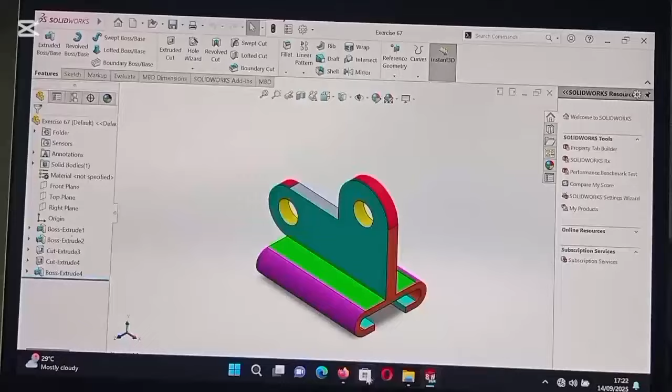Today we are going to modeling exercise 67.

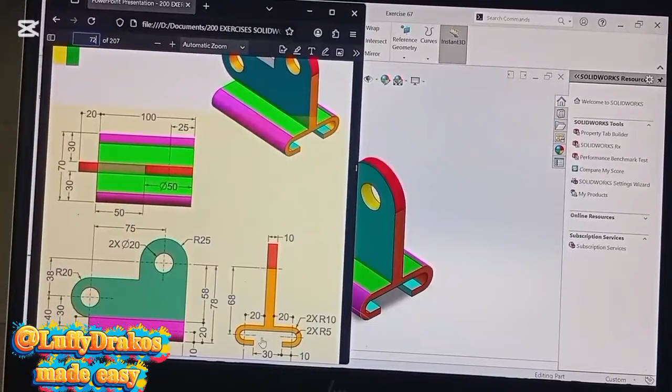Looking at it, we are going to be using the right plane. We are going to be drawing the back view of it, which is this part on orange, the lower base actually. Then we're going to extrude it. So let's start.

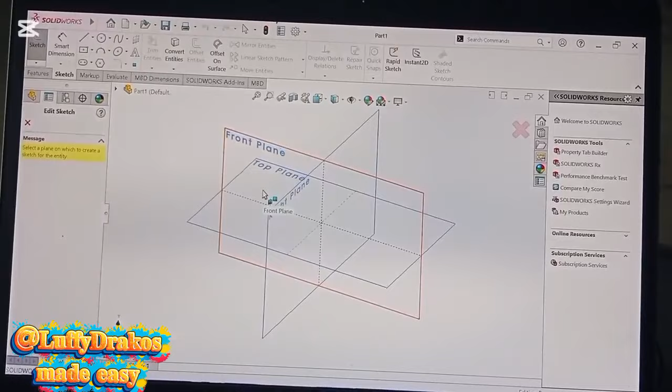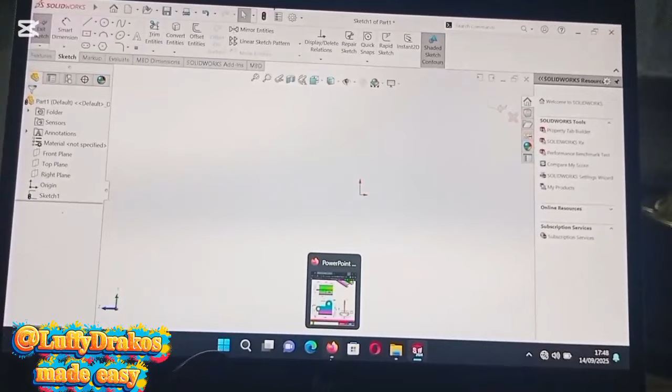Looking at the parameters, we are using 50. Center arcs are 50, while from the two edges is 30. So let's first draw a center line, because I want to use mirror imaging so that it's going to be faster and more efficient.

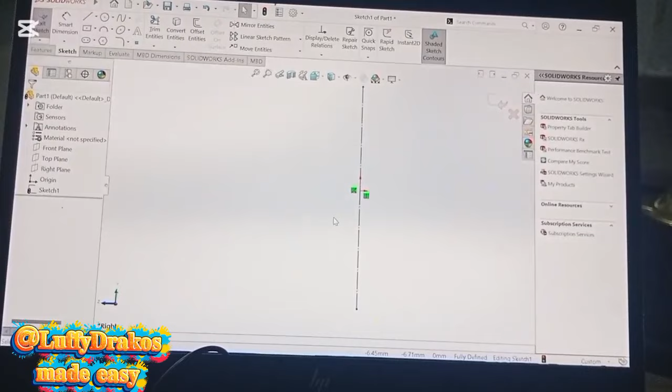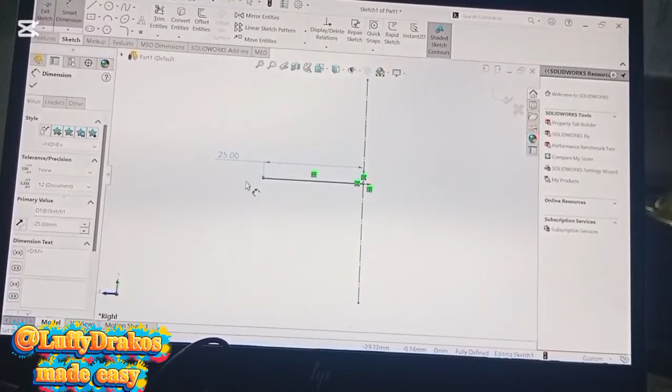So I'm dimensioning here 25 since it's half, which is 25. So I'm going to dimension 25. Then I'm going to draw the arc next. Just drag it out and back to the points for you to have the curve on your next dragging out. Give it the radius of 5.

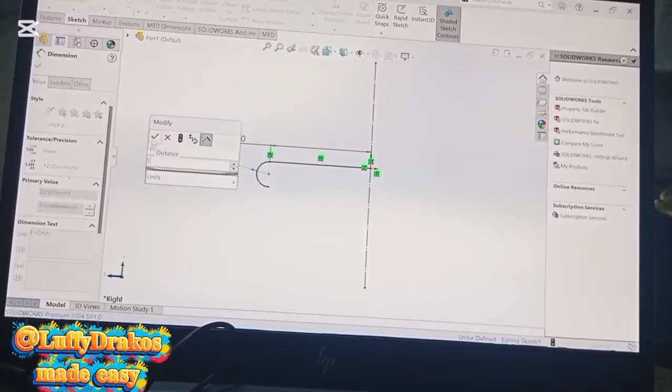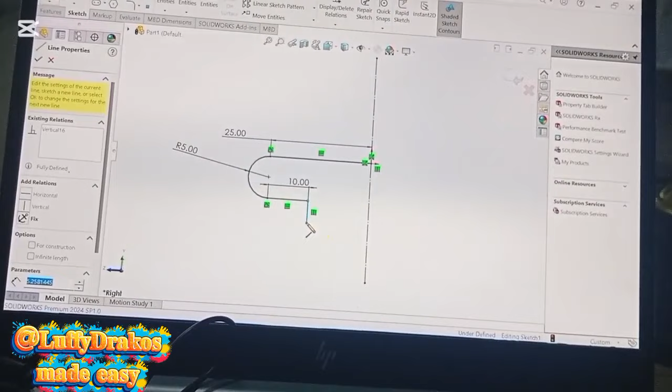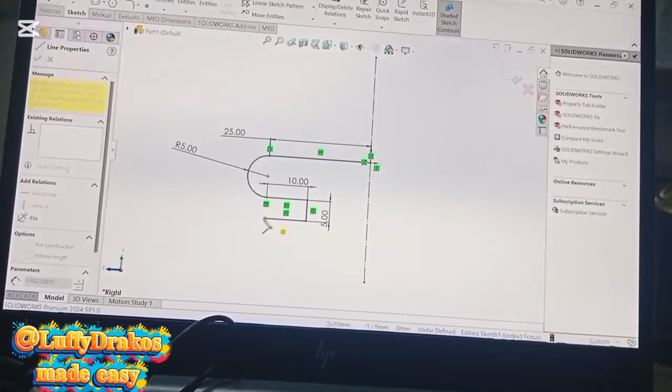I'm going to dimension that part 10. And you can see here is 5. This part is going to be 10.

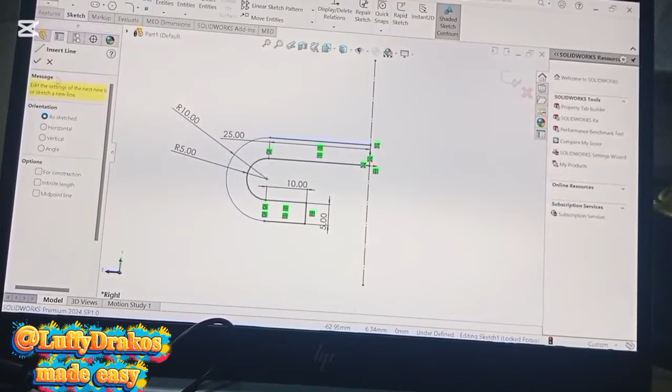So I'm going to delete the 25 dimensioning we did. Then I'm going to dimension it from the point of that arc to the center line. Just give it 50.

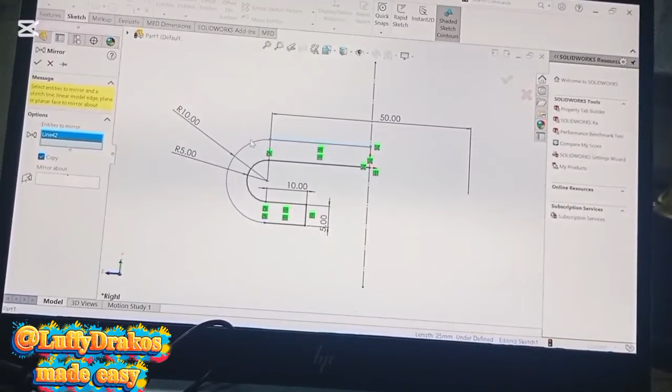Then I'm going to use the mirror entities. Then click on all the sketch. Then you click next on mirror about and tap on the center line. Then click on the tick.

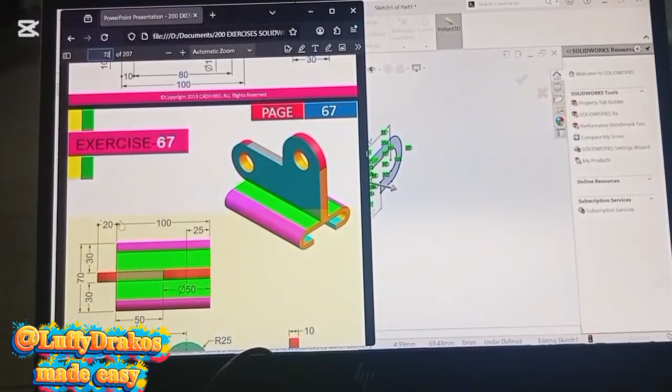So next we're going to be using our features extrude boss base. Looking at the diagram, you can see the length is 100 millimeters. So let's extrude.

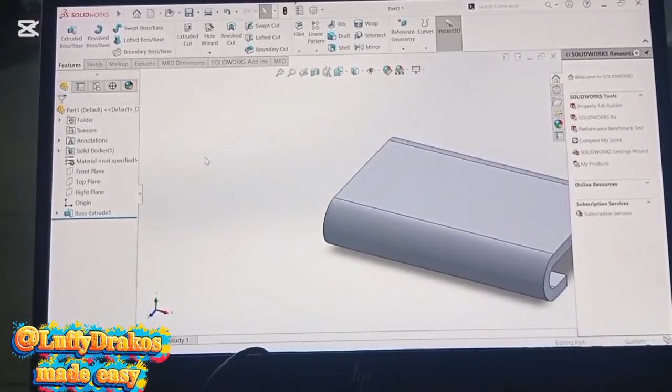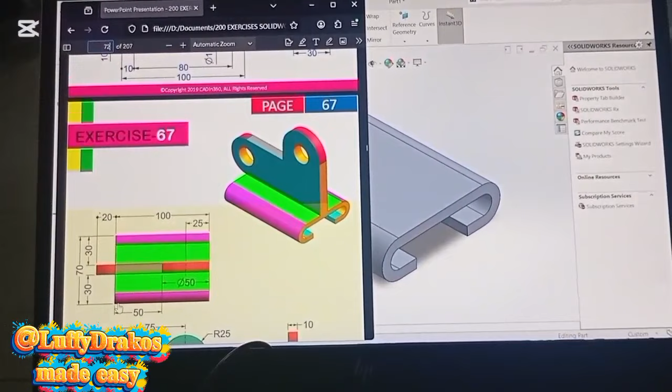So as you can see, this is the isometric view. So next we click on this surface and put up the next sketch, which is this part that looks like an L letter. Looking at it, you can see is just right above it, and it comes out.

So the total length, slantly looking at it, is 100 plus that 20, which is 120, and the distance from the vertical height to the first point is 30.

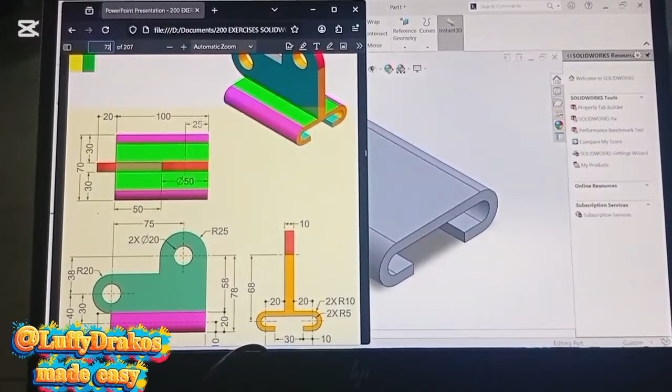First going to draw the center line, then we'll pick the midpoint of our center line and draw with our center rectangle. Let me pick it again. Center rectangle.

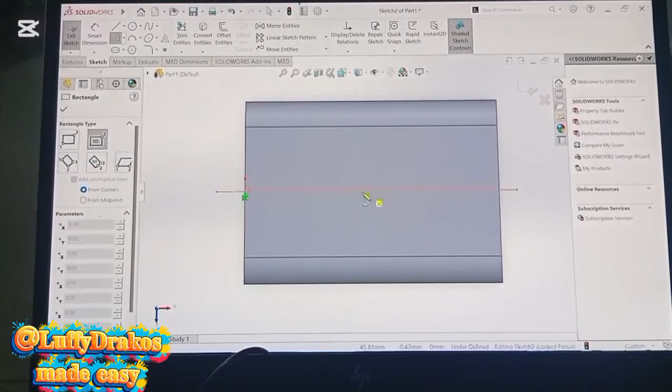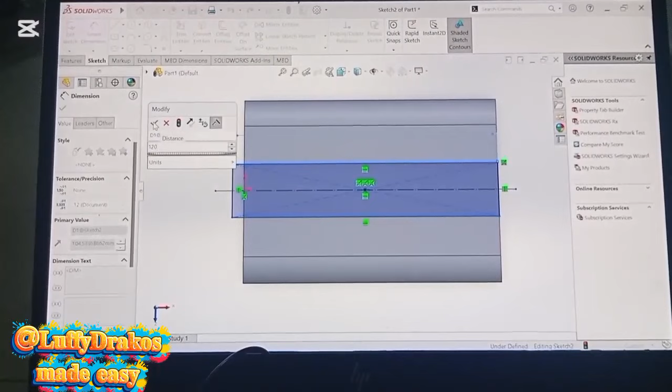So here is going to be 120. The other part is going to be 10. While the distance from the first edge to the tip is 30.

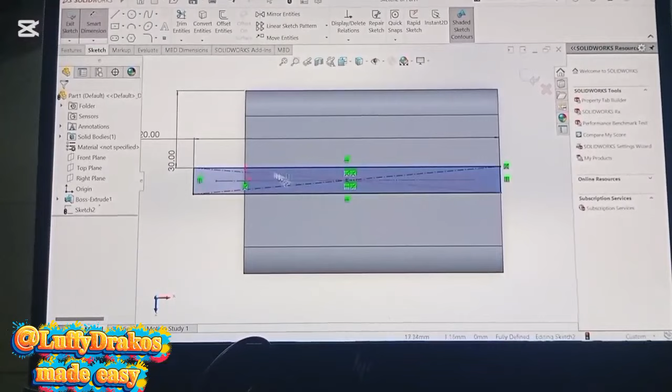So looking at it, the best option for extruding from the bottom to the center of the top circle is 58. So let's go with 58.

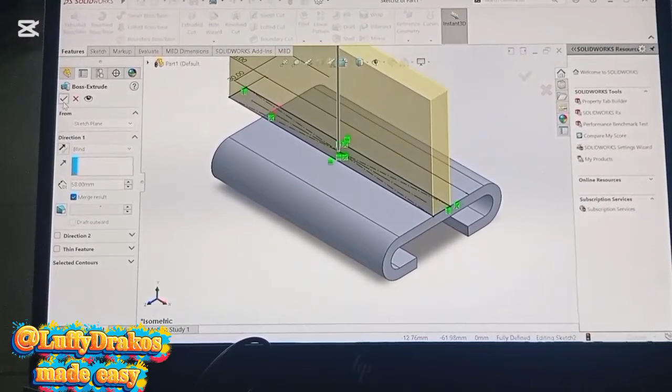So next we click on this surface and edit sketch. So from the center of that curve to the midpoint of the first circle is a distance of 30. So you can see.

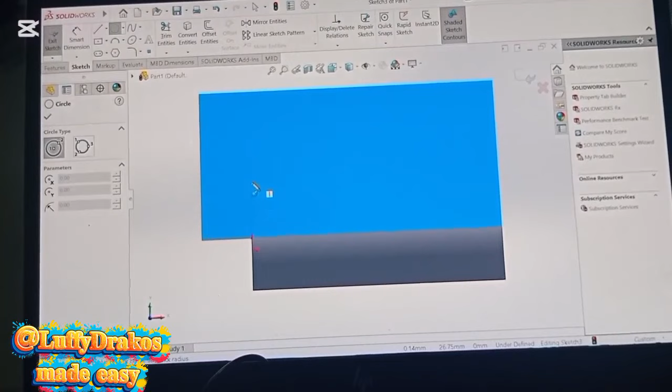I didn't talk about the 20 because the distance from that tip to that center point line is actually 20 already. That's why I didn't talk about the 20. So now let's dimension from that point to the center of that curve, 30.

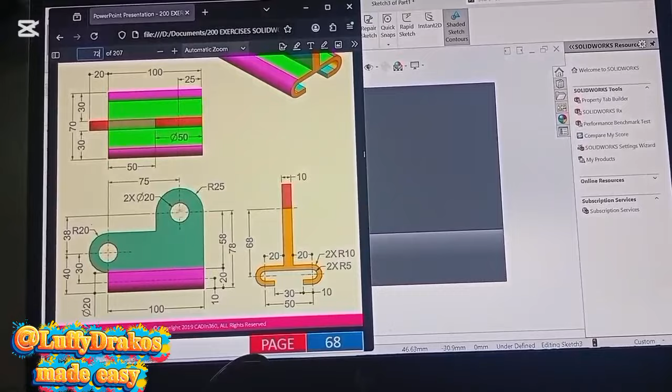So looking at the radius of the outer curve, you can see it's 20. Turning it into a diameter will give us 40. So I'm going to diameter the first circle 40, and the inner one, which is 2x, is 20 diameter.

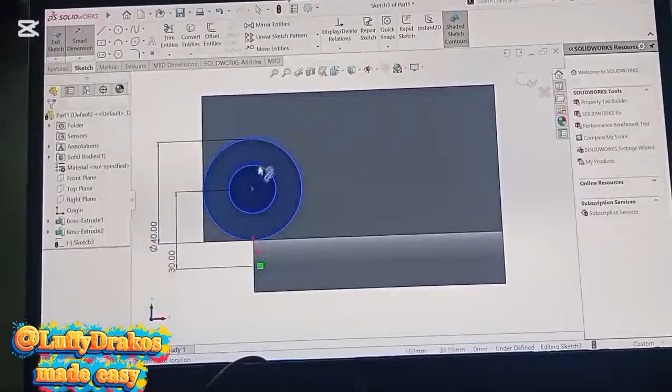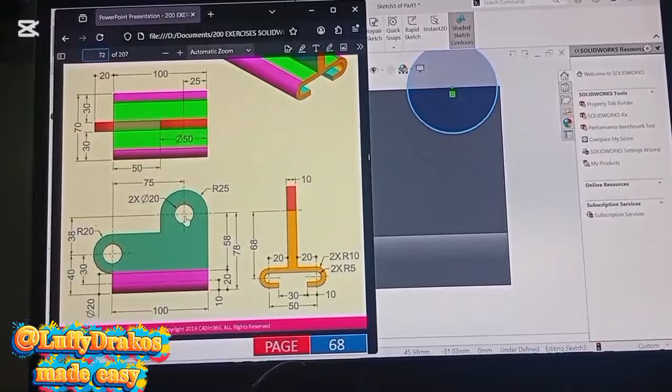You already know the midpoint of the upper circle is 58, which we extruded. So we're just going to draw from that tip and dimension from both center points. The distance given was 75, so that we'll have the circle at the exact spot we want it. So let's go to dimension it 75 now.

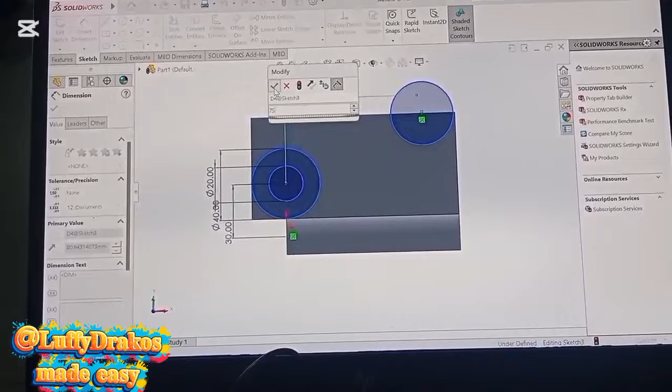The radius was 25, so we're going to make the diameter 50. Same thing with the inner one, which is just 20 diameter.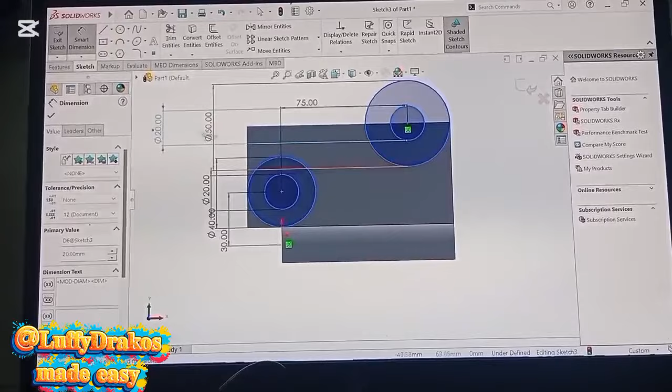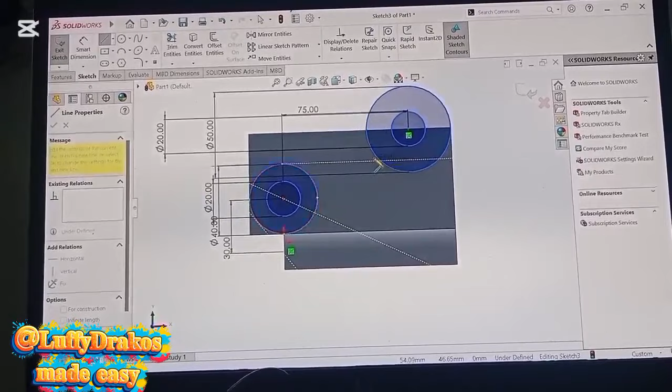So from the tip of this circle, you can just trace it out and draw. Then link it to the tip of the upper circle and trace it down back. You see a tiny line. Trace it down till it's straight, then click on it. Drag it up.

Then start from the second part. Do the same thing until you get something like a rectangle. Just like I'm doing mine. Then you trim the excesses off.

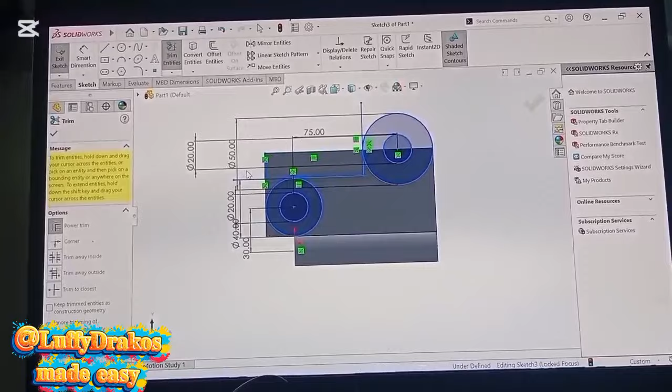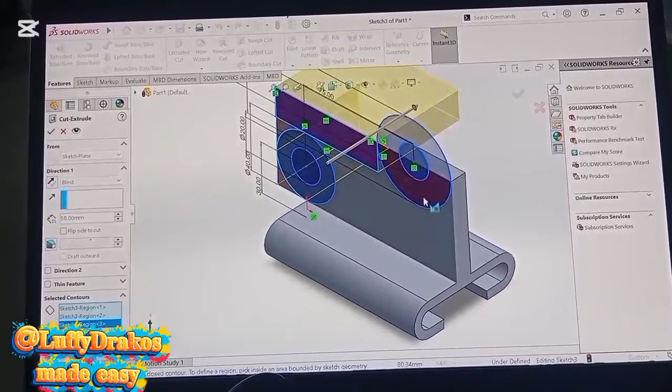So now we're going to extrude cut under features. Cut this first part out and the lower part of that circle, those curves, and then this inner part. Then click on the tick.

So next we're just going to use the extrude boss base. Click on that arrow, click on sketch.

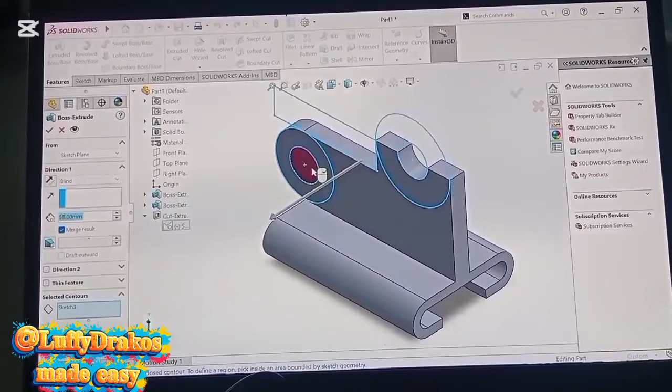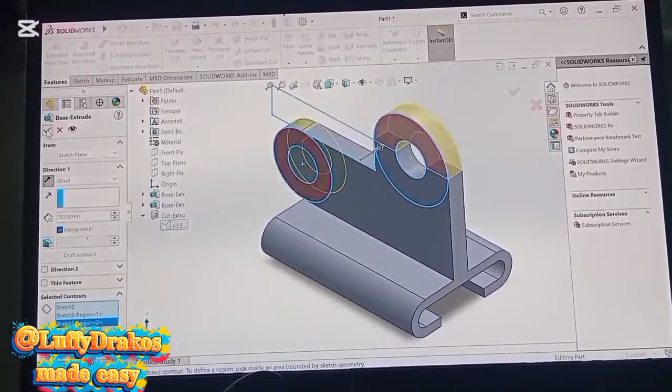Make it 10. Not that you actually need the lower circle, but just for the fun of it. Then click on extrude cut to get the hole you are looking for.

And here is the complete model for exercise 67. Please like and subscribe for more.